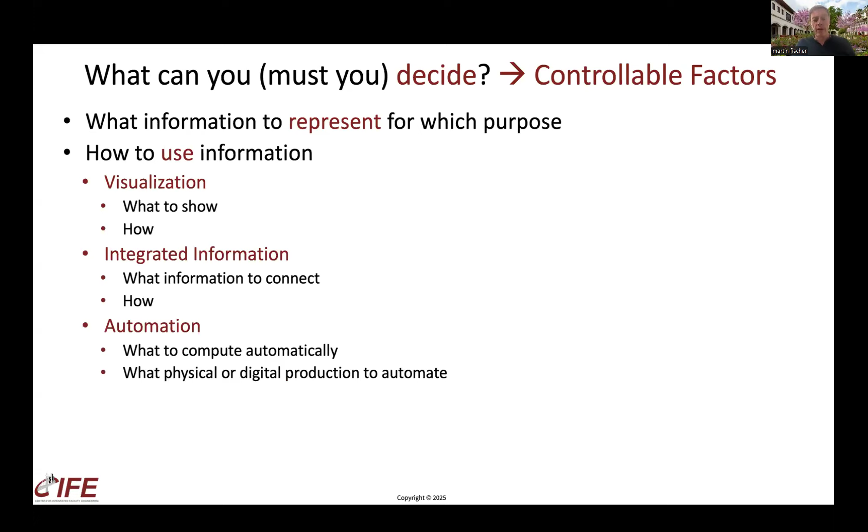Of course, what kind of BIM you're going to use in terms of level of development or model maturity, depending where in the world you are and what term you like. How is it structured, content, format, and all that. And of course, tools eventually. So these are all decisions you have to make so that you end up with the right method that you think is correct for supporting decisions you have to make.

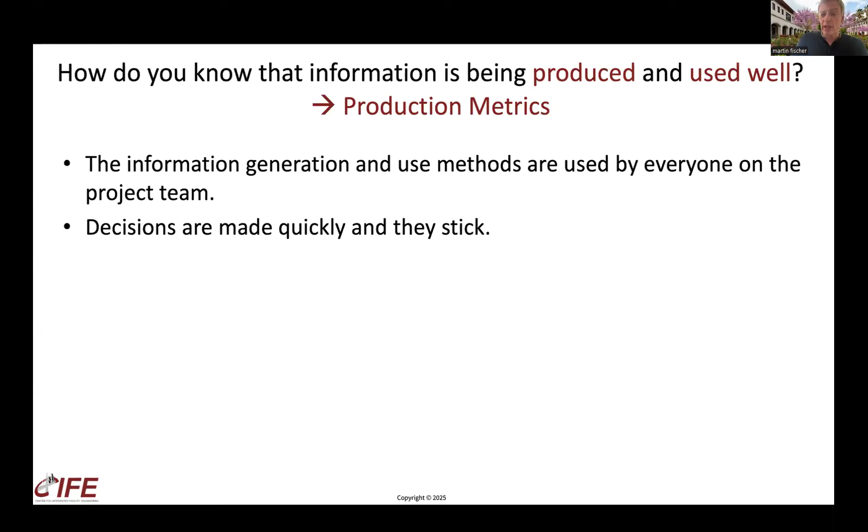And then how would you know that the effort you put into all this is worth it? Here's a few examples of things you could measure pretty soon after you have made the decisions, after you have supported the decision. You can measure how many are actually using the generation and the use methods that you have defined. You can measure how quickly decisions are made and how much they stick. Many organizations that I know have started to do that, and they have seen great value from understanding this performance on their projects.

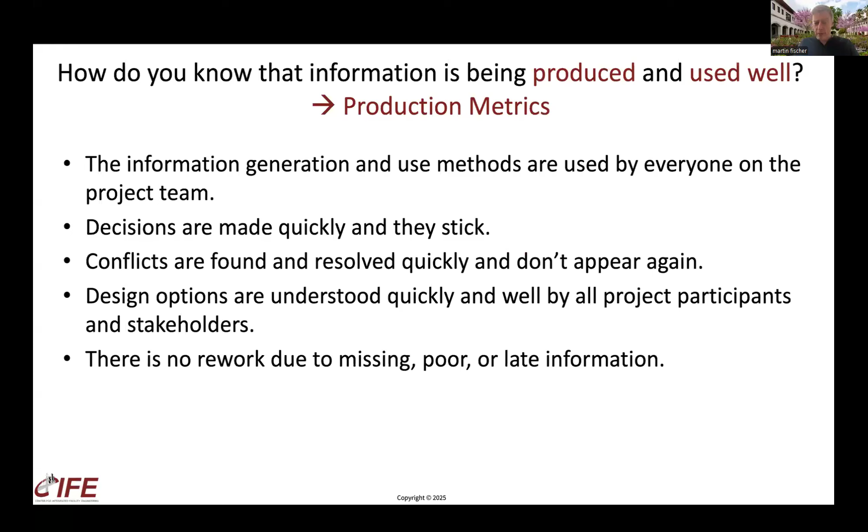You can see how easily conflicts are found and resolved, how quickly they are resolved, and whether they appear again or not. You can see how quickly project participants and stakeholders understand design options, how much rework there is due to missing, poor, or late information, and how your information management strategy and decision-making strategy is enabling downstream work. For example, to what extent can you do offsite fabrication from BIM?

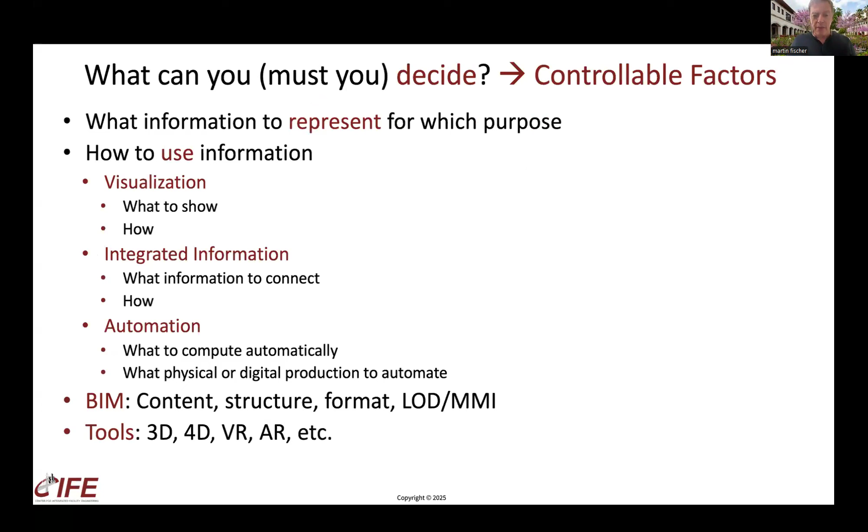And there's more, but these are some of the main ways I've seen companies in industry assess whether their information management strategy, which is what they decided here, decision support strategy, is actually working. And then, of course, to make corrections if the performance is not where they would like it to be.

All right, so I want to jump into examples now. You will see two guides to these examples. I will go through these guides quickly because I will show these examples. But I have three examples related to the buildability of the building. So I'm using the criteria that we have defined in the Integrating Project Delivery book that you saw on the title page, the buildability, usability, operability, and sustainability, to organize the examples.

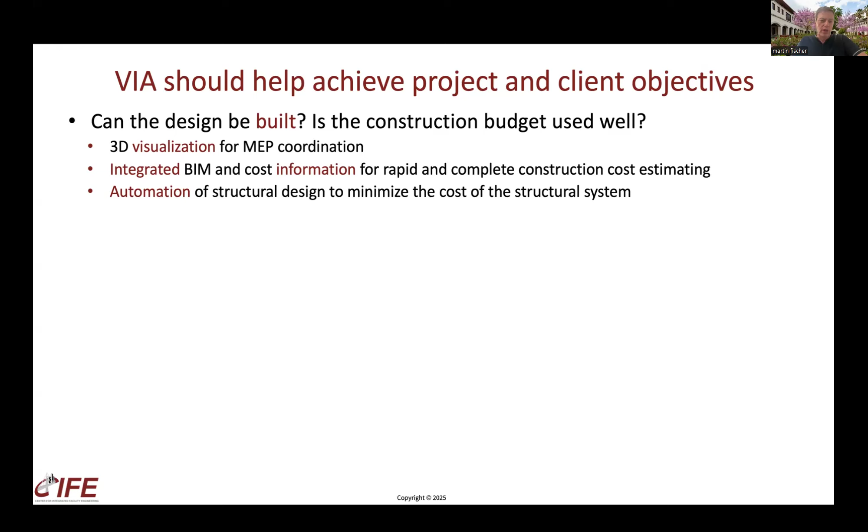So I wanted to have examples for each of those four major performance areas of buildings. So is the building attractive for users? We have some examples there. Can the building be operated efficiently? And is the building sustainable? So let's jump into these examples.

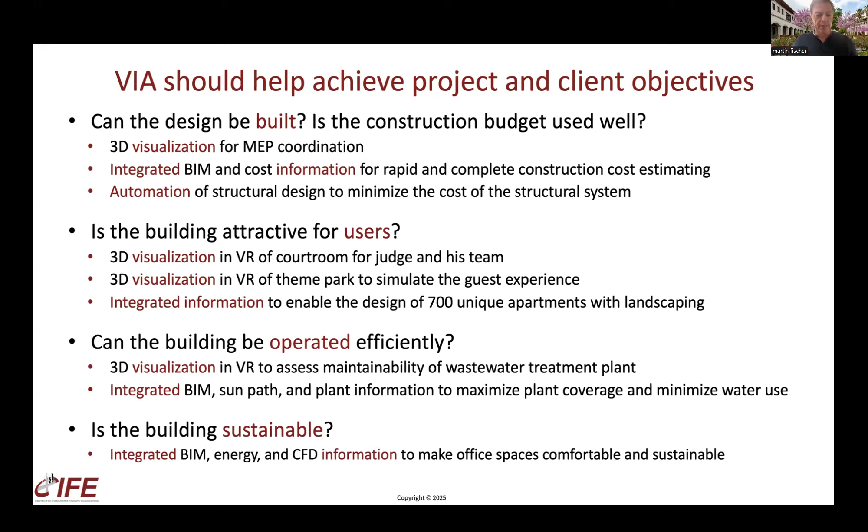I imagine visualization is quite clear, obvious to you and straightforward. This, of course, includes 3D and 4D visualizations, but also related information to those. And what I found is that when you have an important question or problem on the project, even if you don't have a way to immediately create a visualization to support a decision about that, you can, with the tools today, create such visualizations and pay for that out of project budget and get your money back. At least that's my main experience.

Excuse me, just take a sip of water here.

So on the right, for illustration purposes, you see in the upper picture a judge doing a conceptual design review in a virtual reality cave, which was done quite many years ago, actually. And it was the first time this client, the General Services Administration of the United States, had employed this method for conceptual design review instead of actually building a physical mock-up, which was much more expensive and much more cumbersome, and led to much less good feedback than what we were able to do here in a 2-hour session with the judge and his team.

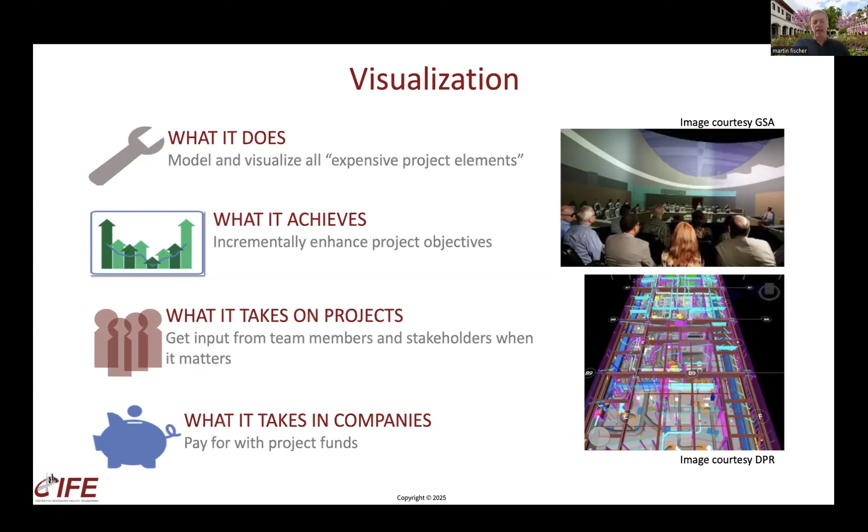And below you see what is done on almost all projects these days: the coordination of the main technical systems in a building with 3D. That's partly integrated information, and partly automation, because obviously you can automate some of the checks, but it's also visualization. That's why I put it here, because not everything about the performance of our systems has been codified yet. So we also need, in my experience, people with experience to actually review a design visually, then say, yes, this works or doesn't work.

A nice example of supporting decisions, like here in this case, can the wastewater treatment plant be operated? We saw this a few years ago in the design and construction of the largest wastewater treatment plant in San Francisco. This was actually during the pandemic, and we were able to support the project team from my research group, my student Simge, with virtual reality applications, because everybody was in home office during the pandemic, and still they had to move the project forward.

So they sent VR headsets to everybody's home office, and then they had these project review meetings with the maintenance staff to figure out, does the access work? Is it productive for them to operate and maintain the facility? If you're working especially in the industrial sector or mining sector, you might have done similar reviews as well.

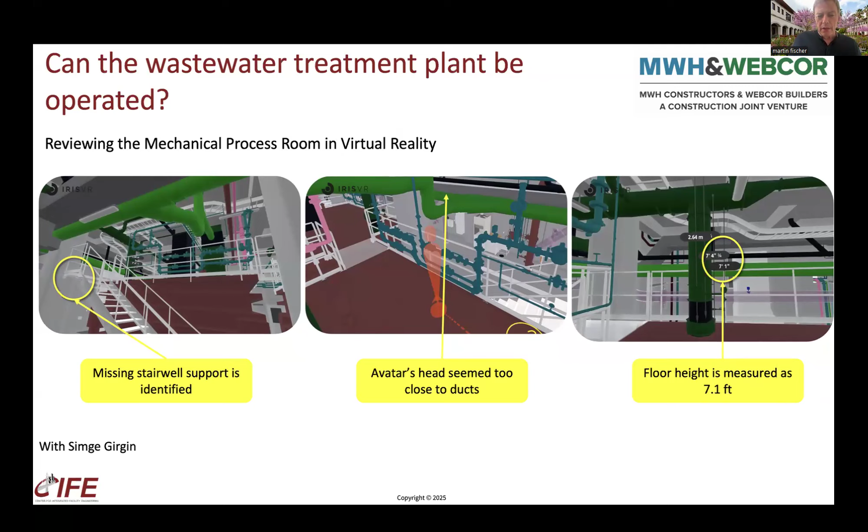Or then simply having a design review meeting, update meeting to say, well, how is everybody doing with the design? Is everybody good with where we are today? Does everything work? All the systems, the design, the performance for which you're responsible, is that okay for the project? And it was very powerful, again, to be in the same space with the others. Here you see the avatars of the various parties floating around, so you can see what everybody's looking at, and discussing this design in an integrated way, right?

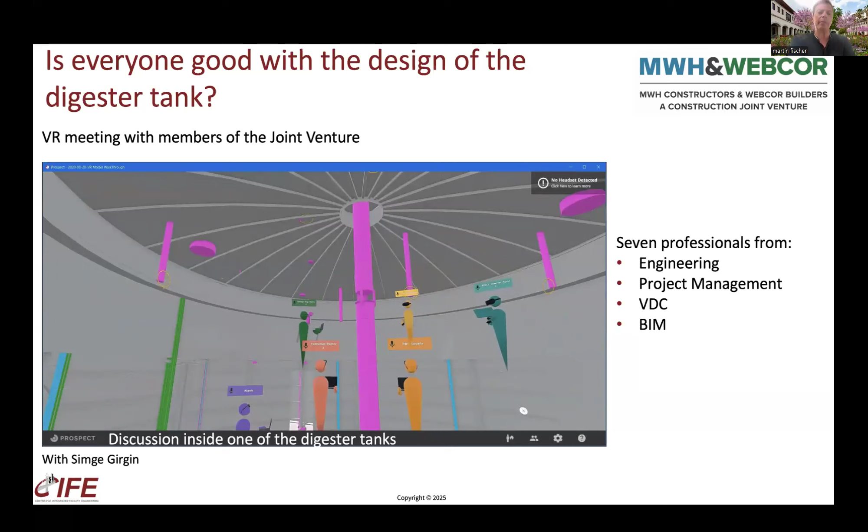Or last example here quickly, this has been interesting for me to see at Disney, when they design theme parks. It's normally not just one person, but for confidentiality reasons, it's just showing it like that. They typically have design sessions. When they're in the middle of a project, what I saw is that they had design sessions twice a week with about a dozen people co-designing part of a theme park, being immersed in the environment of the people they're designing the theme park for, the guests, the children, the families, how they will experience the theme park, designing it directly in that visual environment.

That is an extremely powerful tool, because that's really an example of what I mentioned at the beginning. We cannot yet mathematically codify everything. So this experience from the range of people, architects, ride engineers, and many other parties that have to come together in this case and make a good design, finding a way of harnessing all of their expertise concurrently is really, to my knowledge, the most productive way in which we can advance these projects.

So I want to also show, for one of the examples, what some of you that might have taken VDC are familiar with: how the decisions, like in this case to use a virtual reality environment twice per week, connect with ultimately what the client needs to achieve. In this case, the client really cares about the guest experience, and they measure this very carefully in the case of Disney. And they had, of course, a target there.

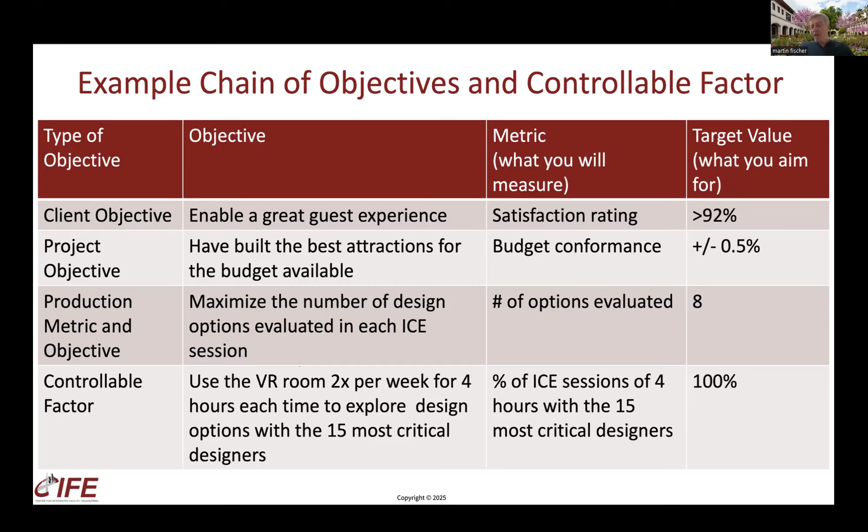So as I said, I think visualization is quite obvious, and as you saw, I focused mostly on 3D visualization, but as I mentioned, you can also illustrate the timeline or other related information, right? So you should think of visualization quite broadly. Then, of course, we always need to support these kinds of social interactions on projects, absolutely key for making decisions and for building trust.

But then we also have engineering systems, structural analysis systems, energy systems, management systems during operation, during construction, scheduling, cost estimating, and so on. So we need to do a lot of analysis to figure out how we're doing and whether our course of action is good. And so in support of that, integrated information is super, super important and helpful.

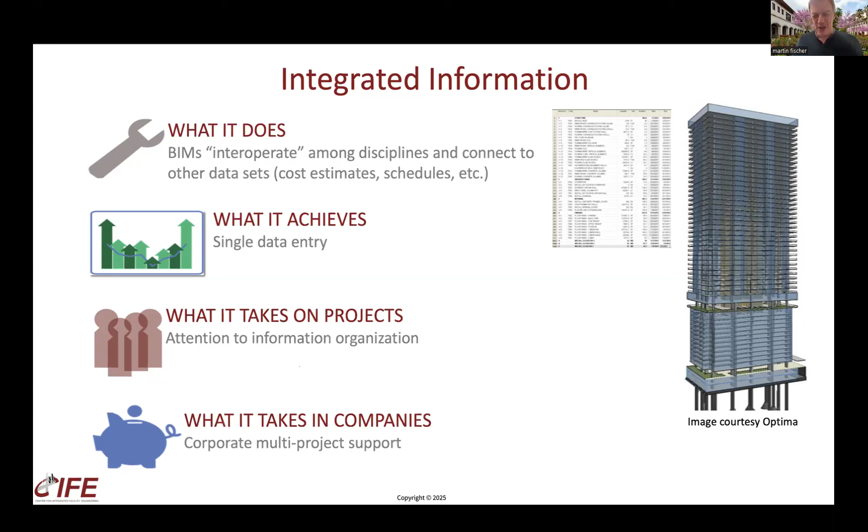Integrated information, though, can be a little more challenging because we have to teach this stupid tool, the computer, to do something that for us is often obvious. So that can be challenging. But I showed you a 42 and 60-story tower. I showed you the Disney theme park. And you can say, yeah, that's all good for these kinds of big projects. Does this actually work for a small project?

And this was a really interesting experience I had with Carolina Lozano, a student in our master's program from Peru. Her family has a small construction business here in Lima. And as she was learning about BIM in our classes, she came to me and said, well, Martin, you keep showing these big projects, but I'm curious whether this would also work for small projects that we do, like a small development of a small retail area, as you drive through the city in lots of places.

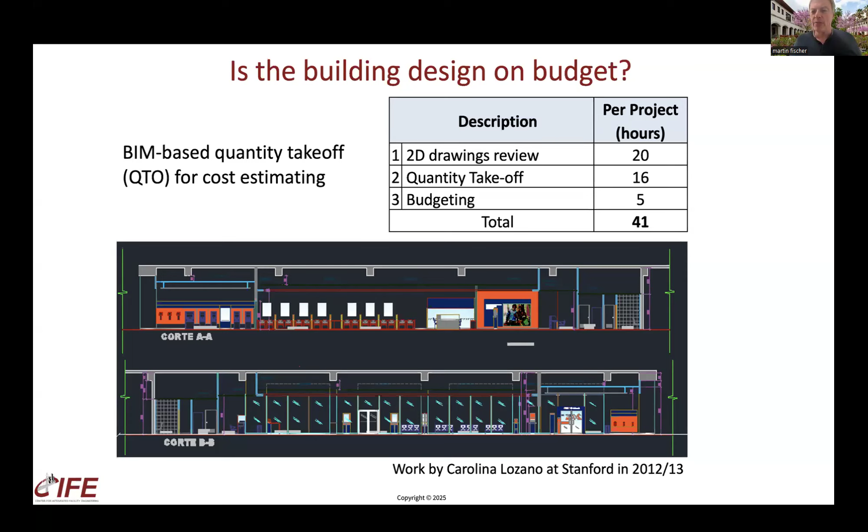And she said, I have access to all the data from the company because it's our family business. So would it be interesting to do a comparison between how we work today with 2D drawings, and then integrating the information, cost estimating, quantity takeoff, and BIM? What would the cost of doing that be, and what would be the benefit? So she found that on this particular project, they needed at the time 41 man-hours to make the cost estimate. And so then she built a BIM and used that for the quantity takeoff and to make the cost estimates.

And you can see that the BIM-based effort was actually longer, 53 hours instead of 41. But then as she reflected, she said, well, actually 32 of those 53 hours are things I had to do to set things up that I wouldn't have to do on the second project. If I did a second project, I would only have to do the project-specific work, which was 21 hours. So that would be half of the time. So as you can see, with about two projects, you break even.

And after that, you are much faster with the BIM-based method, even with these types of small projects. And in addition, she found benefits worth about 10% to the company. With the BIM method, she saw a way to avoid almost 4% of mistakes that were made with the other method, with the traditional method.

And she saw change orders worth about 6% that they also could have realized more easily if they had seen them earlier. So this was a really quite interesting experience to see that, yes, even in small projects, businesses, even more than 10 years ago, it made sense to work with integrated information, in this particular case, do cost estimating.

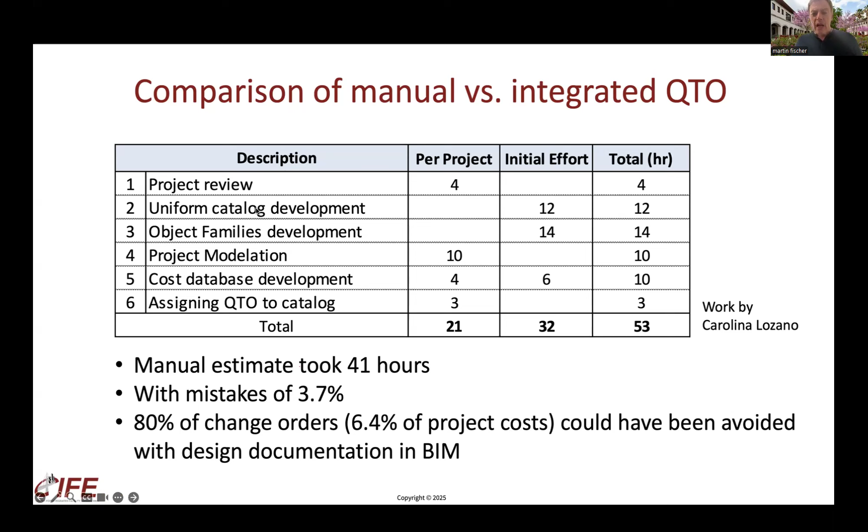Another example, one of the first examples where I really saw the power of integrated information, was the development of this quite high-end luxury apartment complex in Scottsdale, Arizona, also by this company Optima that I mentioned for the Chicago Towers. This was really quite a remarkable project. It was done before the financial crisis. So again, as I said, I want to show some examples that are more recent and some a little bit further back to show you that these companies have been working with these methods for quite some time.

And this was a remarkable project because it has 700 apartments and not 2 apartments are alike. Every apartment has a unique feature that only that apartment has, which I think is quite amazing. The other remarkable thing is that they have double the landscaping across the whole project than the ground area of the site, which in the hot climate of Phoenix, Scottsdale is, of course, super nice. It actually lowers the temperature in the complex by about 6 degrees Celsius compared to the outside.

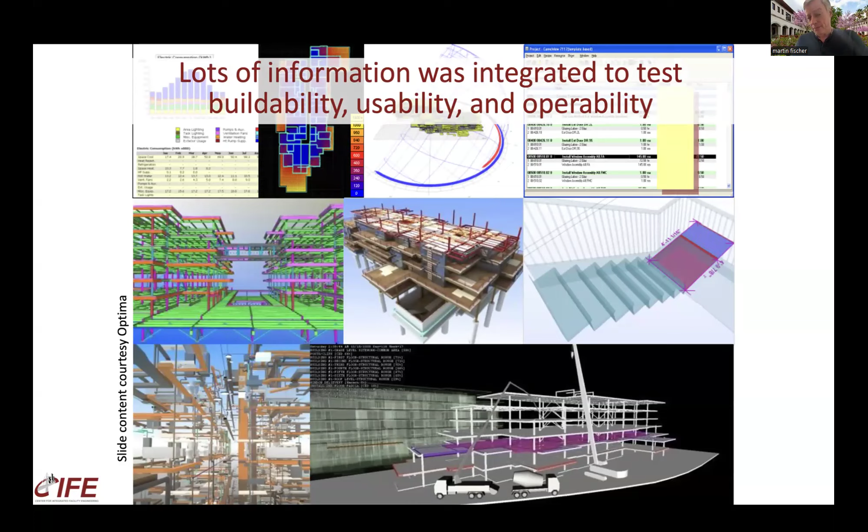And so they integrated lots of information to figure out buildability, usability, and operability. I'll just flip through. I'm sure you're probably quite familiar with this, especially since this was done a few years back. But detailing, construction planning, coordination of systems, getting data for various analysis, and that's one example I want to go a little bit deeper, because it's super hot, obviously, as you probably know, in Arizona. So that's why they wanted the plants. But then, of course, it can be very expensive to maintain the plants and keep them growing.

So they organized the project into different zones according to how much shade there was and how much sunlight there was. They had sort of 4 zones, and then they tested in parallel as the project was being designed, what plants did how well in which zone with how much water, so that they could find the plants that did the best with a particular amount of shading with the least amount of water. And of course, this kept changing as the design kept changing.

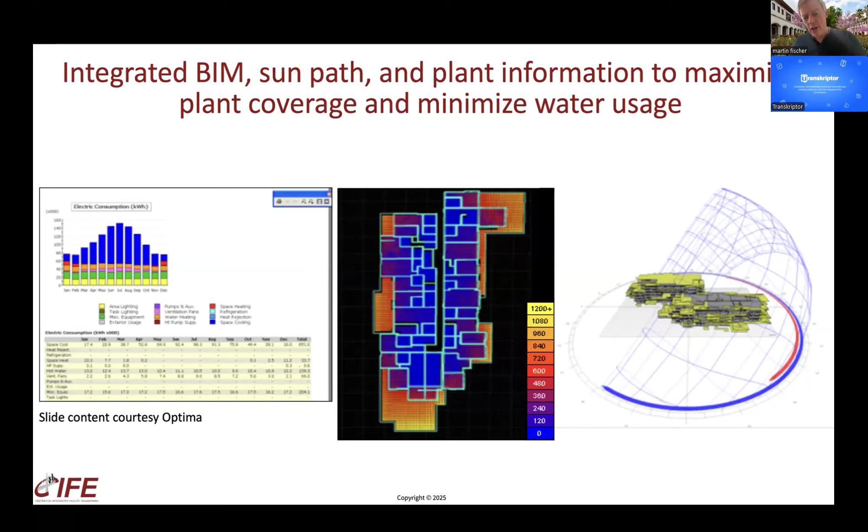So they had integrated information in BIM so they could rapidly calculate, given the new configuration of terraces and apartments, etc., where they needed how many of which plants and how much water they would likely need during the operation to support the growth of those plants and make the complex look good. I thought this was a very nice way of using integrated information to support a fundamental feature, a key feature of the design, and also improve the sustainability of the complex by having more plants, having lower temperature, which lowers the HVAC cost, but also spending the minimum amount of water you could get away with.

So this developer actually credits working with BIM and making better decisions with BIM for still being in business, because this was obviously quite a high-end complex for which the market in 2007, early part of 2008 was very good. And because of BIM, they were faster and were able to sell enough apartments, which was the client objective here, that they could sell as many apartments as quickly as possible. And to sell those apartments as quickly as possible, they of course needed to build a sufficient number of apartments. So that meant they had to manage the risks as quickly and as best as possible.

And so there, as you could see here, for example, the risk and challenge I illustrated was to make sure you have the right plants so that you can then operate the facility easily and the place looks as attractive as possible so that people want to buy these apartments. And so again, this is how decisions to use BIM and integrated information allowed the collaboration and decision making by the many professionals. They looked at many more aspects, as you can see here in the numbers.

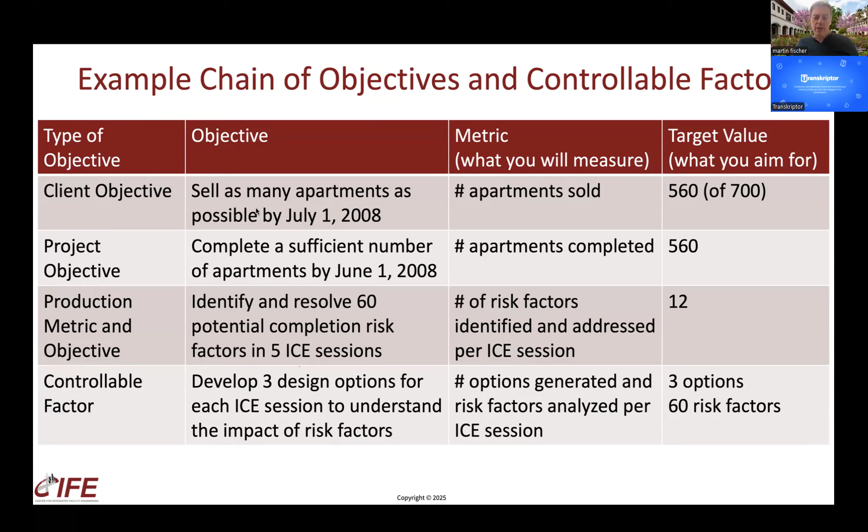But to be a little bit quick, I just want to give a summary here. And again, encouraging you to think through the whole story, from decisions you make in terms of how you're going to use BIM to the effect you should be able to measure quickly, to the effect that should have on the project, and then the future use of whatever you're designing and building.

So finally, last example on automation. I think that's the future. I think we have to start to automate more. And if you're already automating quite a few things of your work, then fantastic. If not, I really encourage you to begin to automate. Of course, there's automation of creating details, for example, automation of fabricating from the BIM. In many parts of the world, this is now quite well established.

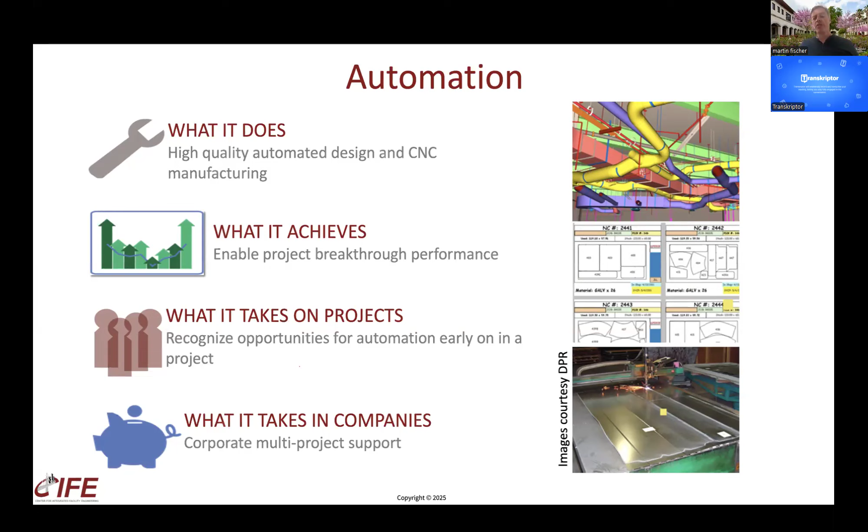Here, I want to show an example of automating for optimization. Automation is typically most expensive of the three methods. So you need to think quite carefully, strategically, about where you need an automated method.

In this particular case, one of my PhD students, Filippo, came to me a few years back and said, "Hey, Martin, I think we can fully automate the structural design of a steel structure, actually a composite structure like we have in California, which is a steel structure with then a metal deck and then a little bit of rebar and a little bit of concrete, which is the typical structure for buildings. We worked on buildings much bigger than the one showing there, but we had to sign a non-disclosure agreement, so we can't actually show the actual building."

And I said, "So what do you mean by optimize?" He says, "Well, what I mean by optimize is not just optimize for material weight or material cost, as you can do already today. What I mean is that we actually optimize for all the cost, that we optimize for material cost, fabrication cost, and erection cost," which has been really elusive up to that point.

So we had to work actually pretty hard to bring together property developer, architect, structural engineer, general contractor, steel fabricator, steel erector, because we needed data from all of them. So they needed to trust each other and us that we would keep the data confidential, because we wanted to work with real data. So in the context of one project, Filippo, I should say, was able to develop this optimization method. And then we were able to apply it to a new project.

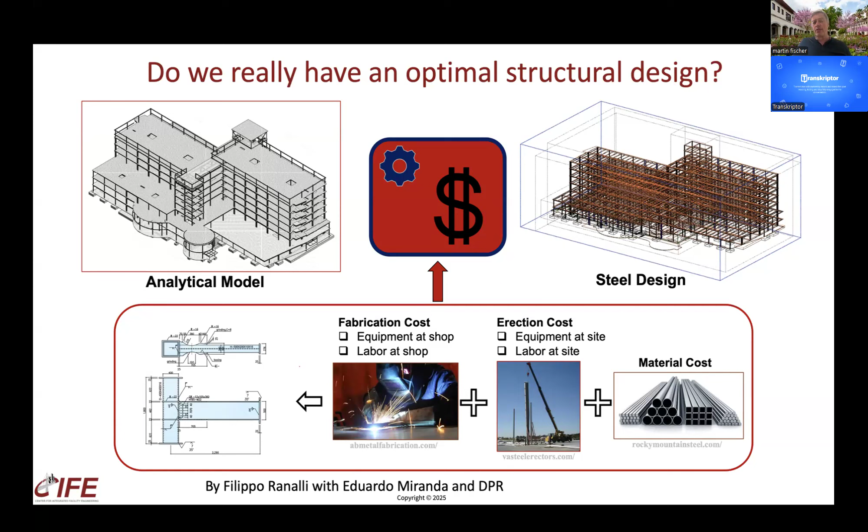And I want to quickly show the results that we got from automating the design of the structural system so that it can be optimized. That's right, because if it's automated, then we can run through many different options. Anyway, let me show the results. So the structural engineer did the design how they normally do it. It's a very good structural engineer. And they created a design over several weeks that cost about $4 million.

And the optimized automated method developed the structural engineering in 1 hour, and came up with a structure that performed at least as well structurally, of course, but cost almost 10% less. You can see that all of the savings are coming from details. And this was really interesting for me to see, because we are designing the main structure and the details concurrently, we can go back and forth between different designs and see what design of the main structural elements leads to the most productive details.

And this is something that couldn't happen on a project. If you do it in a typical sequential way, you might just be lucky that the structural engineer happens to choose the particular details that work for the particular fabricator and erector, or might be somewhat unlucky. I wouldn't say that was really that bad here. It could be much worse, of course, but still, the developer, you can imagine, was quite happy to have 10% less cost on the structure and put that in a part of a project where the future users, tenants, purchasers of the condominiums, it was actually a mixed use project, could actually see it or experience it.

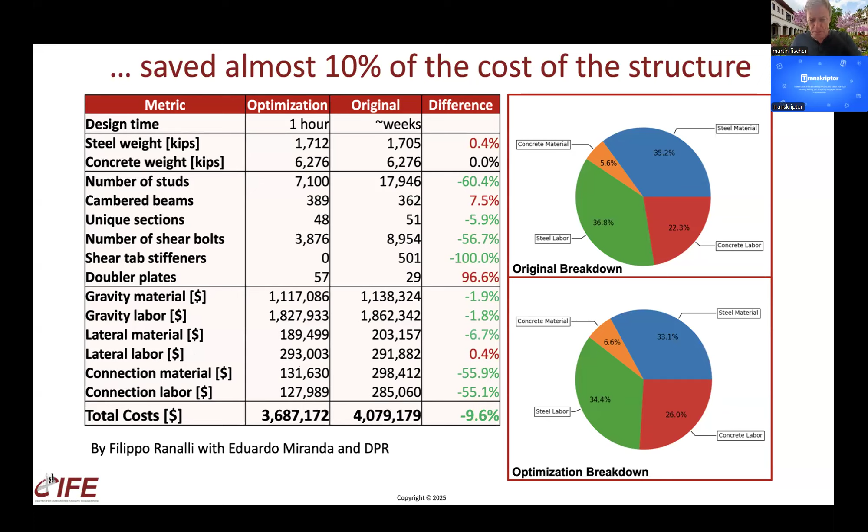So here, again, if you connect the story to what the developer wants to do, the developer wanted to lease this building as quickly as possible, and so wanted to make the building as attractive as possible. So building as many amenities for the renters as possible, more than the competition can offer, was part of the strategy. So that's where the optimization of the structure through the automated design software became an important part of enabling that strategy, as you saw from the cost savings.

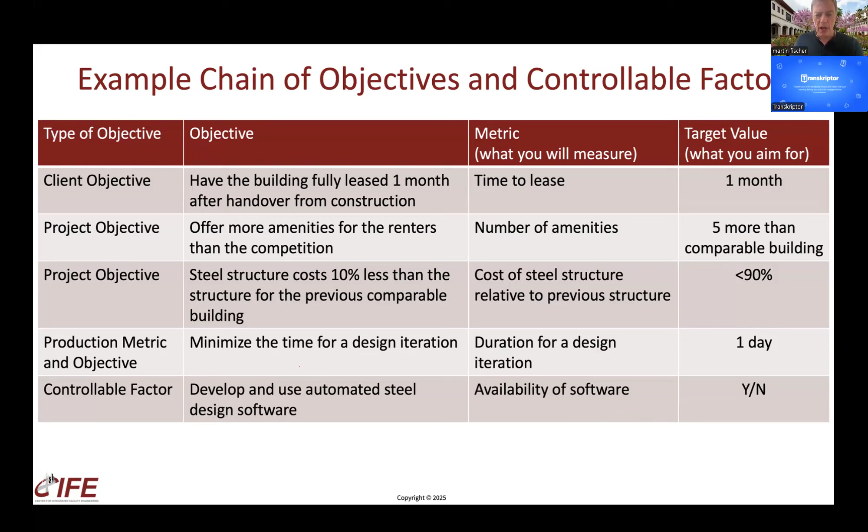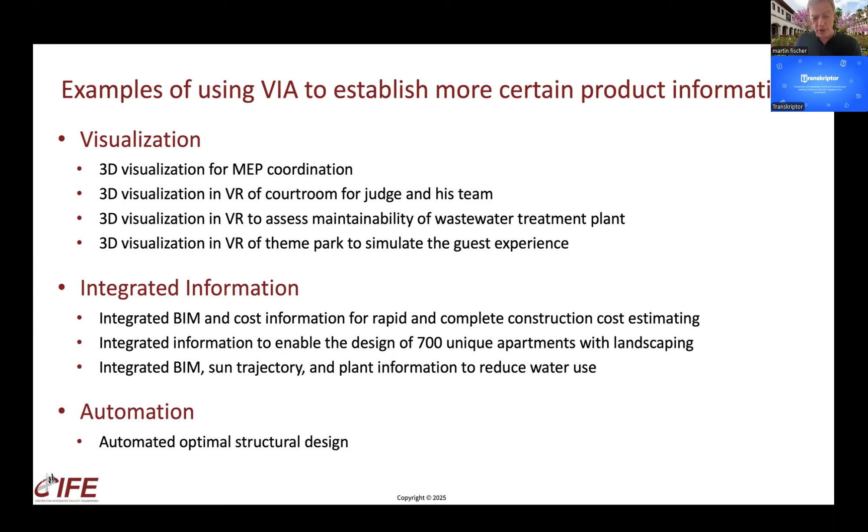And so I wanted to also give you a recap here. We saw some examples of visualization, integrated information, and one example of automation, with a couple others I briefly touched on. And so hopefully this is a guide that, if you ever look at the slides again, helps you think, maybe get some inspiration of what you might want to do in terms of visualization, integrated information, and automation, so that you support decisions.

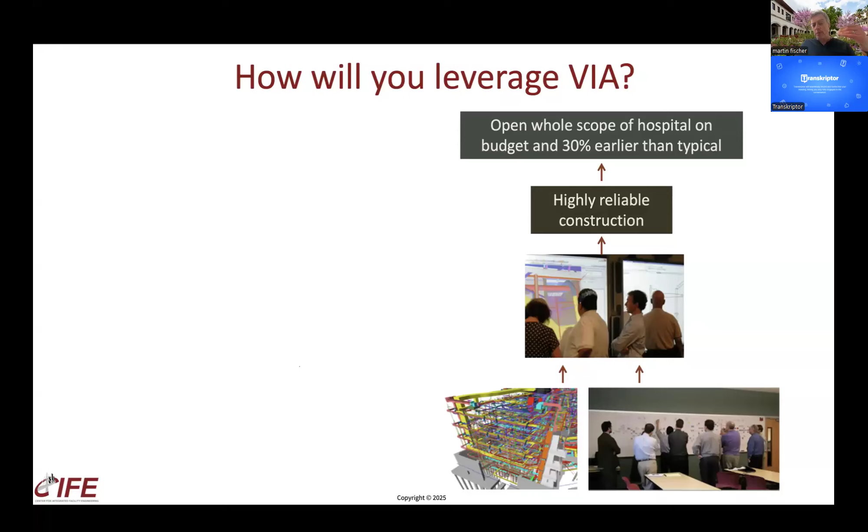So I think you've seen that what we call VIA, visualization, information integration, and automation, enables faster and better decisions, provides certainty of product information, and basically makes the project unfold much better. So to summarize, I encourage you to think about how you're going to leverage visualization, integrated information, and automation on your projects. Which decisions are you going to support with which of these strategies? You really should decide, and you should have a strategy for how to move towards more automation going forward.

So for example, what decisions are you going to support with visualization? Here, an illustration from a shopping center in Germany, where they wanted to make sure that the detailing of the structure supported the overall architectural vision of the project.

Or the same project in Germany, which was the first project where this company did quality control with iPads. So they integrated specification information, BIM, and inspections. And they were able to not just get a list of mistakes, but also a list of what they built right the first time, which they had never had before, which was great for them to see what leads to being able to build things right the first time. But first, you need the data about it.

And then here a quick example of automation: automating the layout of mechanical and piping systems, to allow you to rapidly iterate between different design options. I should have come back to the comment, the automation of process changes everything, because you saw that in the structural optimization method. If you can do the structural design in 1 hour instead of weeks, you can imagine a very different design process with a very different interaction between the architect, the structural engineer, and the construction companies than is possible today. That's what's meant with automation of process changes everything. And the same here with the automation of mechanical systems design.

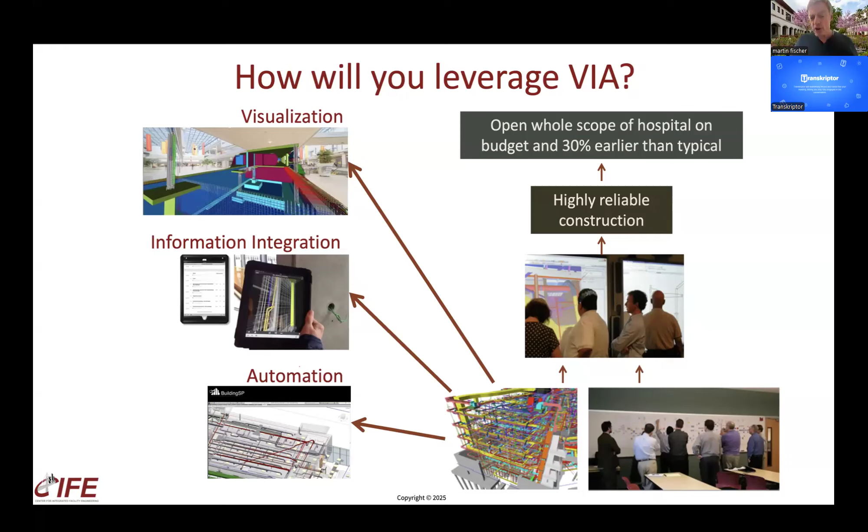Okay, so I hope you found the examples illustrative and helpful, to make clear what I mean by visualization, integrated information, and automation. Of course, we have to make many more types of decisions than I was able to show, and there are many more types of visualizations, integrated information, and automation than I was able to show. But hopefully this framework helps you increase the value you get from BIM on your projects and create better projects.